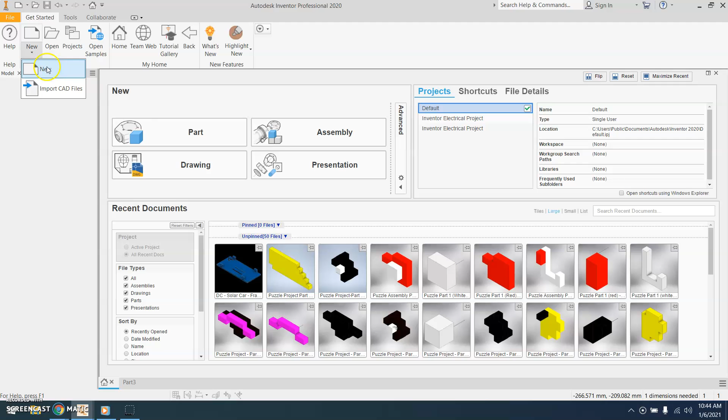First thing you want to do is go back to your home screen, click new, and make sure you use standard millimeters IPT. The sketch says it's in millimeters. Once you're within here, start a new 2D sketch. It says to choose the XY plane. There's no right or wrong way necessarily to do the order of this sketch.

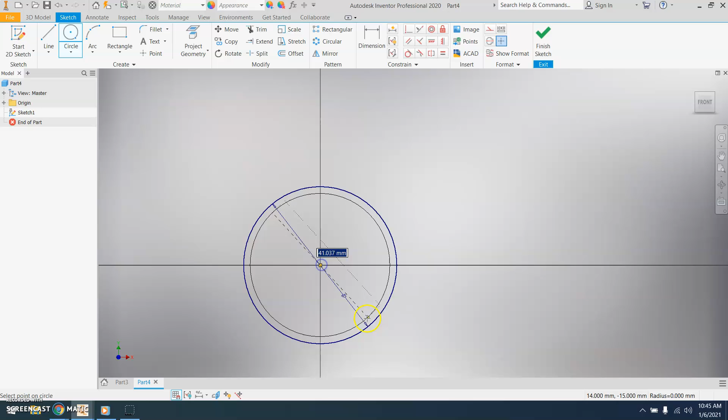I like to start with all the circles. There's 4 circles in this sketch. The first one has a diameter of 45 at the very center of this part. The next one, and this is where the drawing gets tricky, they say 50, but there's no way it's 50. That's the radius. So if something has a radius of 50, then the diameter is 100 millimeters. I noticed that when I was making this.

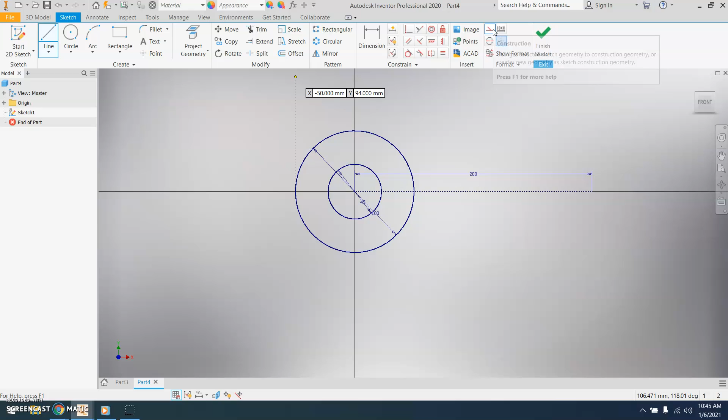Next step is the placement of the other circles that are out on the arm. I would use the line tool and then switch on construction. When you do that, this line is just a reference line. It wouldn't be included in an extrusion or a revolve or anything of that nature. So it says this circle or hole is 200 millimeters away. I'll hit escape because I don't want to continue with that. I'll do another line. Notice the construction tool is still selected, so it's still going to be a construction line. And this one jets out by 125, so not quite as far.

Hit escape. Next step, I want to dimension the angle between the 2 arms on this lever. I say arms, they call it levers, I guess. 120 degrees between the levers.

Now I'll finally put my circles at the end. Make sure you deselect the construction tool. We want this to actually be something that would be extruded. This one is 15 in diameter, and this one up here is also 15.

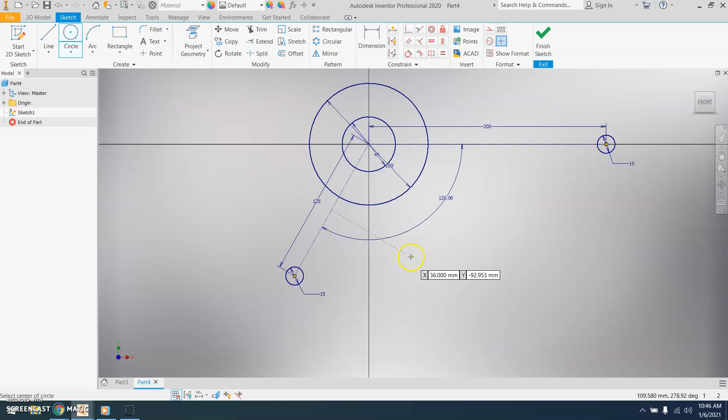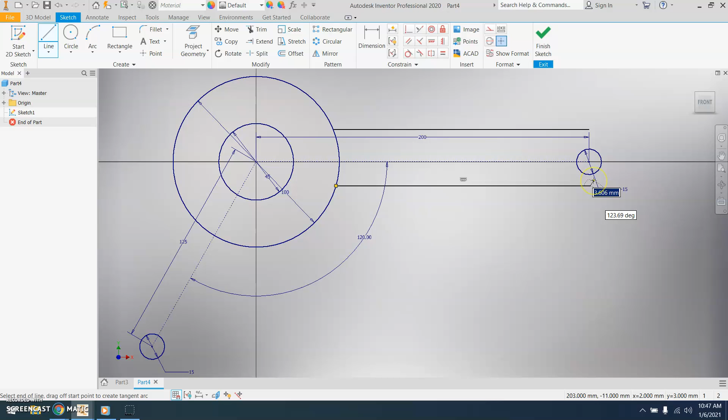Next step, I'll draw out the outline of the lever. This is kind of tricky, there's gotta be many ways of doing this, I'll show you the way I did it. I did a line here above, made sure it lined up with the center of that circle, and made sure it's parallel. Hit escape, then did another line, made sure it lines up once again. Next I did a dimension, and I'm going to dimension this, not 35, because the total width's 35. This would actually be 35 divided by 2, which is 17.5. I like to, anytime I do math, have Inventor do it.

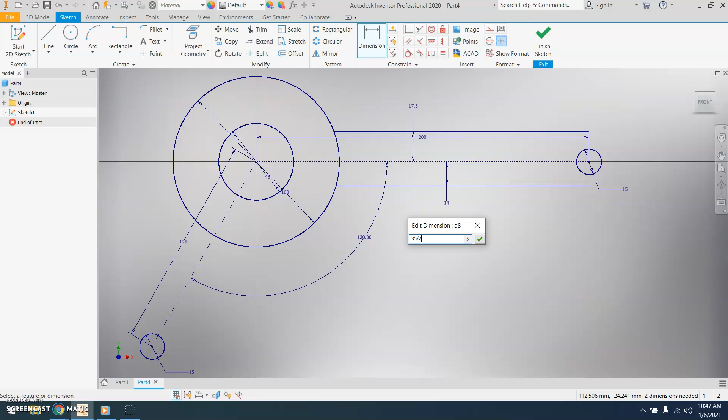That way I can always look back later and see what I did. 35 divided by 2. It's a good way of double checking your math, and later on, if you ever ask how did I come up with that number, you can click on it and see, oh, I divided the total width by 2.

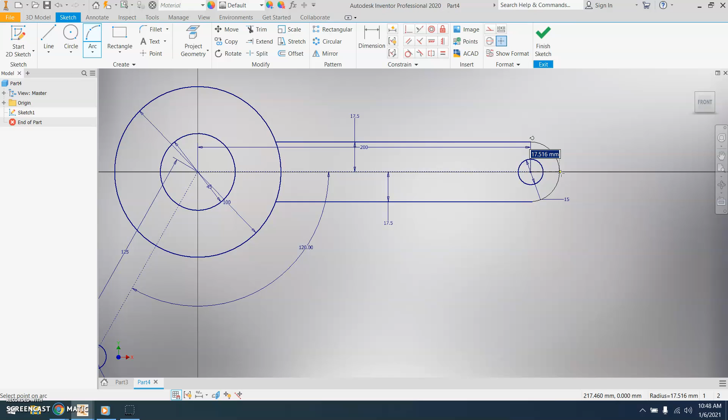Next step I would do is the 3-point arc, and select these 2 endpoints. They didn't give you the dimensions for this at all. I thought that 17.5 looks pretty good. It's kind of unfortunate that it didn't tell us that. For some reason, I had this problem before where the dimension doesn't show up. All right, there, that should be dimensioned. So about 17.5 I thought looked pretty good.

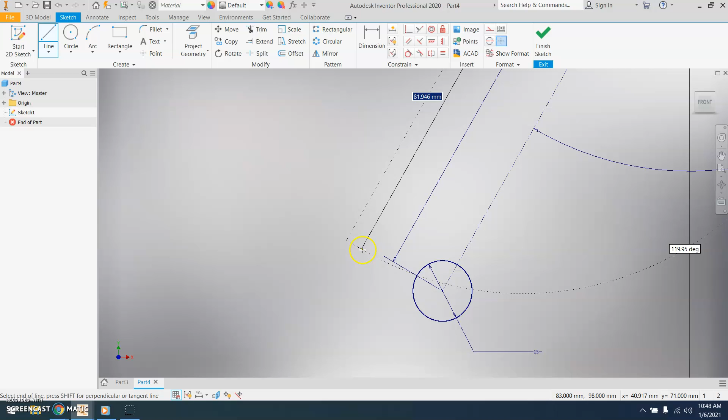Next, we got to do this other arm that comes out. Same thing, I'm going to use a line, make sure that it lines up with the center of the circle, and make sure it's parallel to that line there, which it looks like it did. You can always check that by using the parallel constraint. Yeah, it was, I believe. Right.

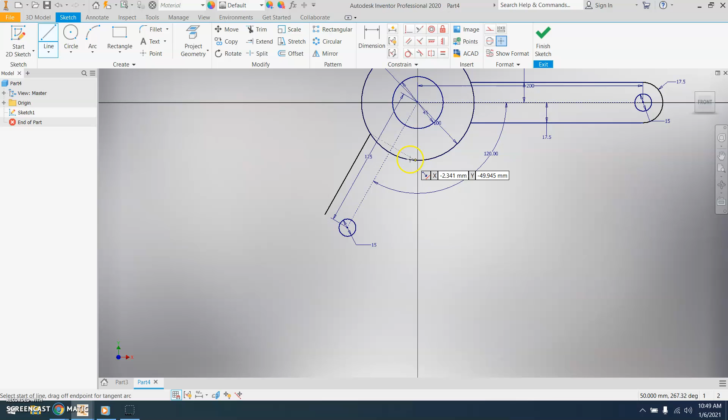And I'll start another line somewhere along here. That's not where I wanted to start it, it kept snapping to there. There we go. Once again, I'll check that it's parallel. I think it is, but I'm not seeing that come up. There we go. And then, just like the other arm, I'm going to dimension this 35 divided by 2 to get the proper thickness.

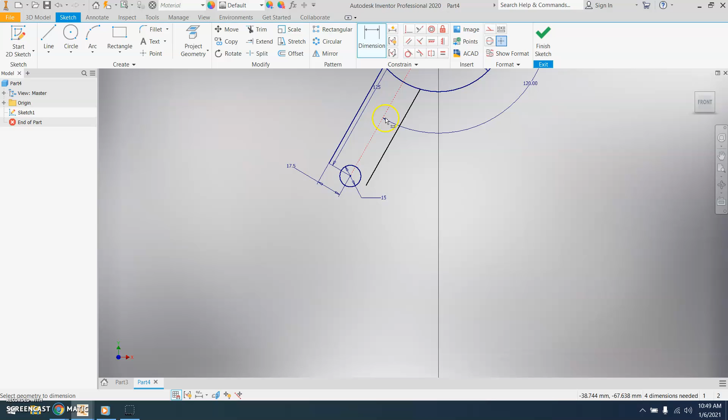All right, then just like before, I'll do my 3-point arc and choose these 2 endpoints. And 17.5, they don't tell you, so. Oh, that did not work out right, you'll notice it didn't. One sec, it's kind of weird that I'm getting a number that doesn't make sense. It keeps doing this to me. And you notice it didn't actually do what I told it to do. There it did.

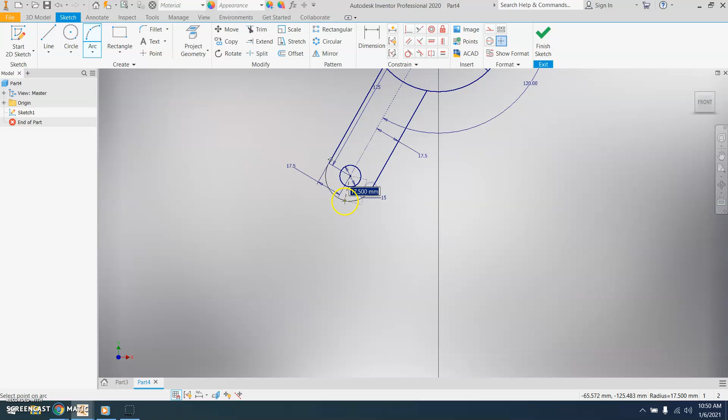Okay, we're looking good. Last thing I believe would just be to trim away this extra material. We don't need that right there and there. So you can use the trim tool to just get rid of that.

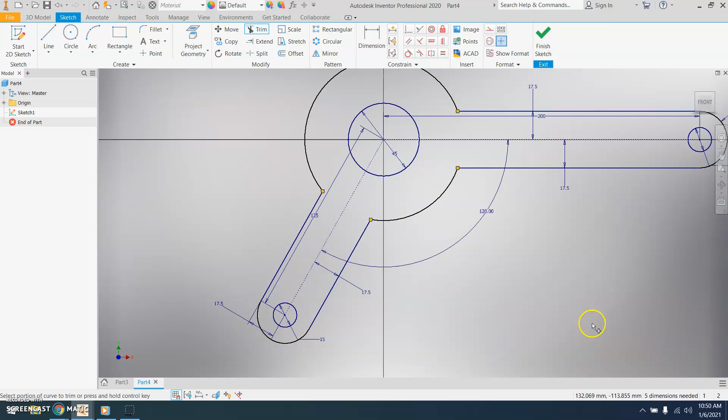I will point out, I'm not happy about this, I have 5 dimensions that are still needed. You should always fully dimension these. To be honest with you, I could not find one of them when I did this before. So we did have the dimension for this circle, but since I trimmed it, that has now been deleted. If we put that on, you'll see I dropped down to 4. This doesn't have a dimension actually because it's no longer connected to that. So now I'm down to 3.

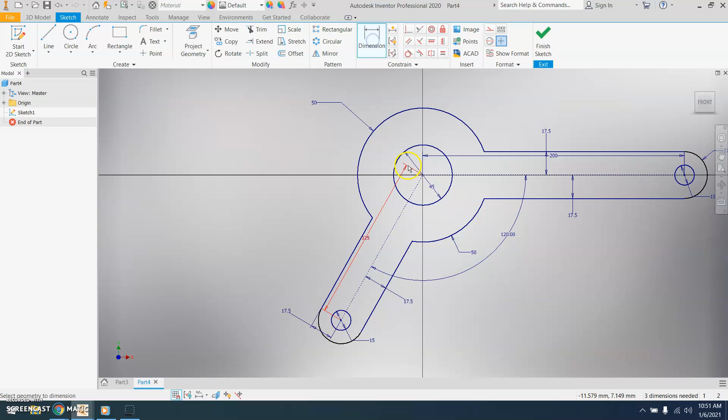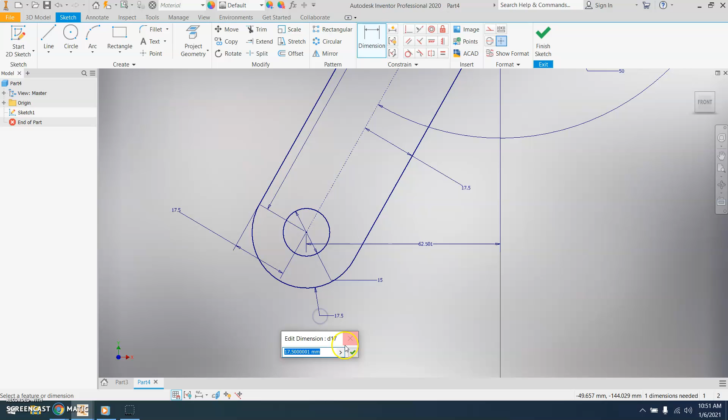The next thing I think I did was from the origin down to here. Nope, that wasn't needed, so delete that. I think it might be from here to here. Let's check. Down to 2. And yep, this is where I struggled. So let me know if you can figure out, I think it didn't put this dimension on here. It might be one of them. Yeah, the 3-point arc is kind of one dimension. And I could not figure out what that dimension was. So let me know if you figure out which dimension I'm missing.